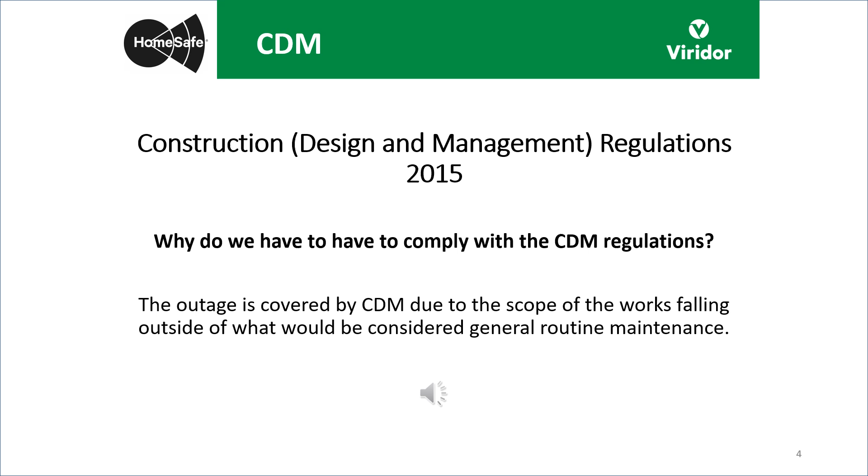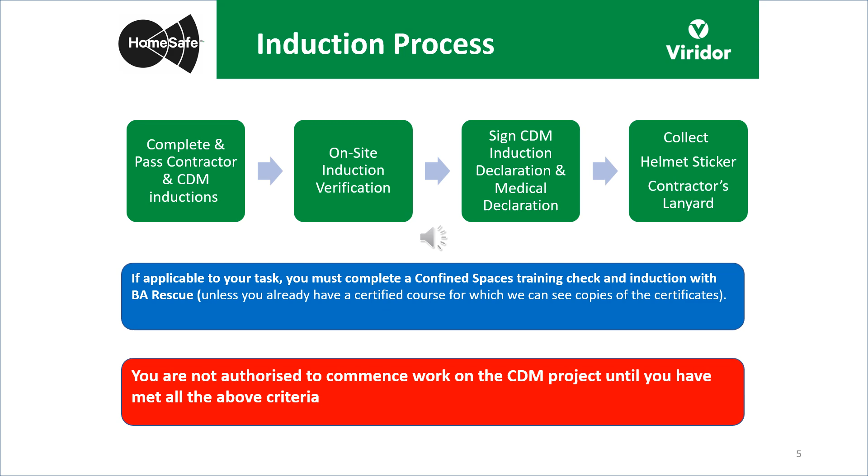BA Rescue will be providing confined space management and security services on site. Please think of them as an extension of the Viridor team, and they'll be able to answer any questions you may have around confined spaces or safety in general.

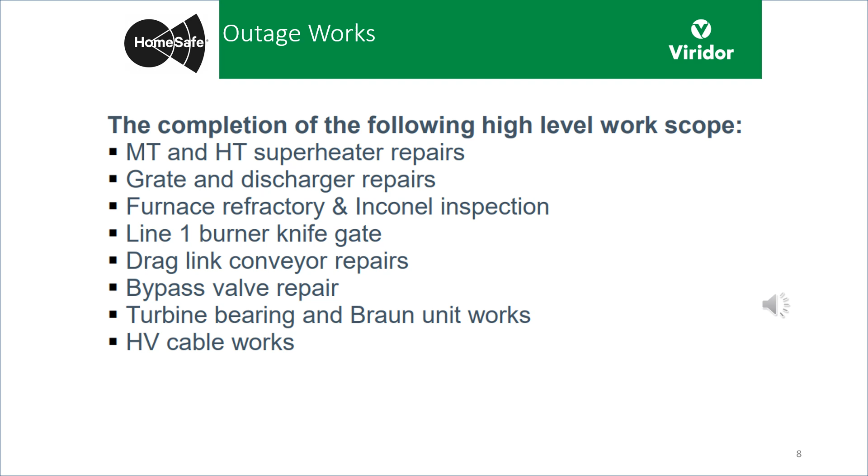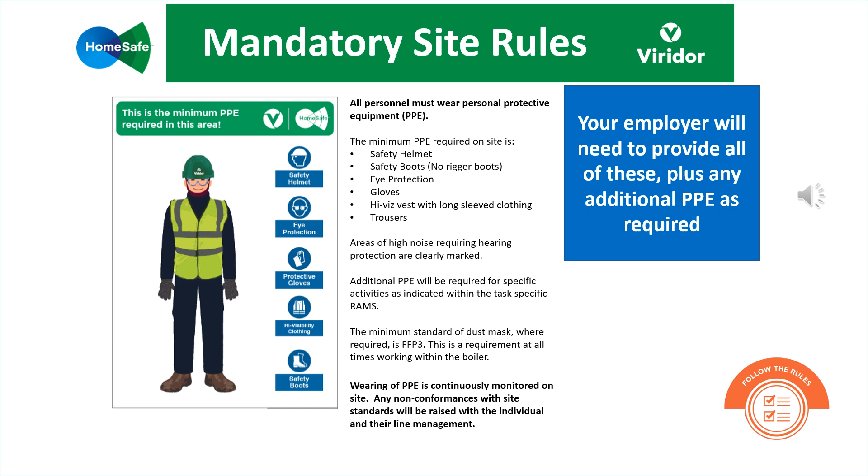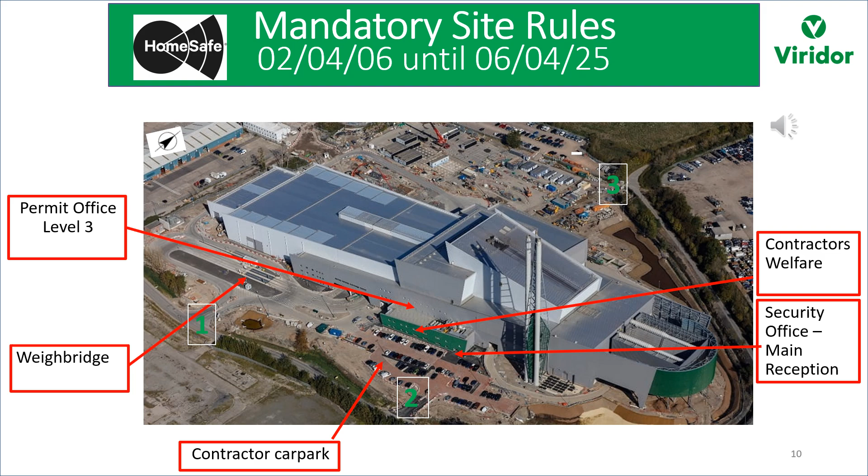The welfare will be in the Polymers building, which will be directed via signage from the main entrance to the ERF. The permit office is in the usual place on level 3 of the admin building.

During the initial stages between the 2nd and the 6th of April, you must always enter and leave site through the ERF reception. This can be found at the entrance to the site and is displayed on the screen. You must sign in and out when leaving site at any time.

From the 2nd until the 6th of April, please ensure that you always leave site via the ERF reception. This can be found on the screen and is at the entrance to site via Gate 2. You must sign in and out when leaving the site at any time.

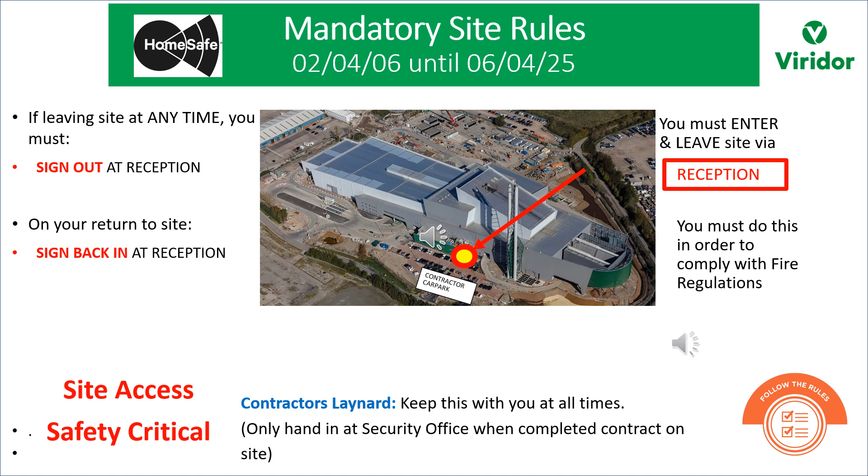From the period of the 2nd until the 6th of April, you must always enter and leave site through the ERF main reception, ensuring that you sign in and out using the book. This is to ensure that we comply with the fire regulations, and should there be an event of a fire, we know who is on site at all times. The ERF reception can be found at the entrance to site as displayed on the screen.

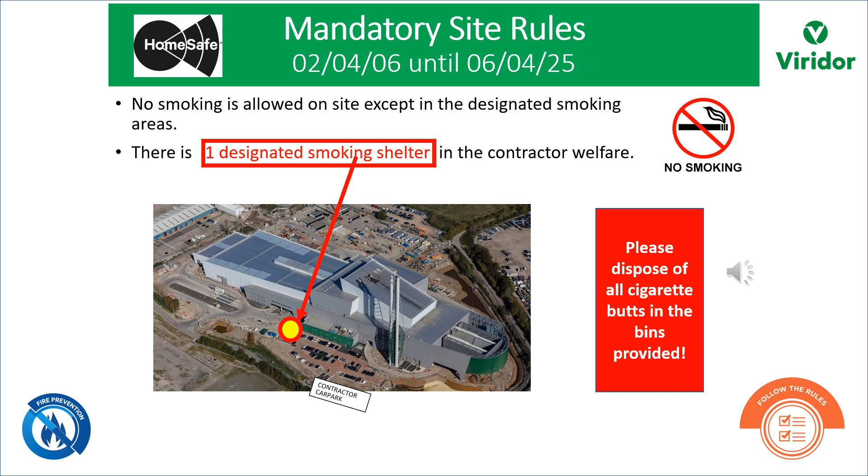There is strictly no smoking or vaping anywhere on site apart from the designated smoking area. There is a designated smoking shelter shown on the screen, which is at the front of the ERF. Please ensure you dispose of all cigarette butts in the bins provided.

From the 2nd until the 6th of April, the muster point is located in the Contractors Village car park. Contractors must make their way there as quickly as possible and make sure you've been accounted for by one of the Viridor fire marshals. You will only be allowed back to your work area when the all clear has been given by a member of the Avonmouth ERF staff.

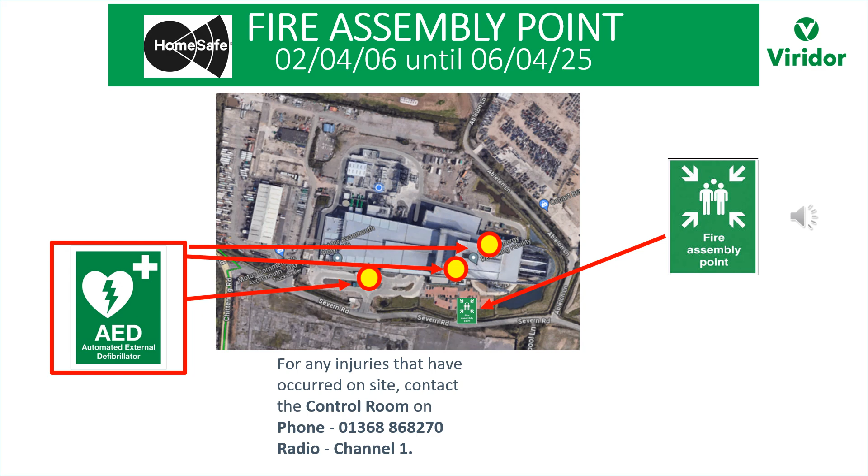Do not leave the site unless instructed to do so by Avonmouth ERF staff. There are also a number of automated external defibrillators on site, including the weighbridge, the level 3 permit office, the level 4 control room, and the ground floor of the boiler hall.

As previously mentioned, contractor welfare will be split into 2 phases. From the 2nd until the 6th of April, car parking is located at Gate 2. Remember, you must reverse park. Please car share wherever possible.

The offices and welfare facilities will be clearly signposted from the Avonmouth ERF main reception. Female toilet facilities will also be available. You as a contractor are fully responsible for the security of your own belongings and equipment whilst you are on site.

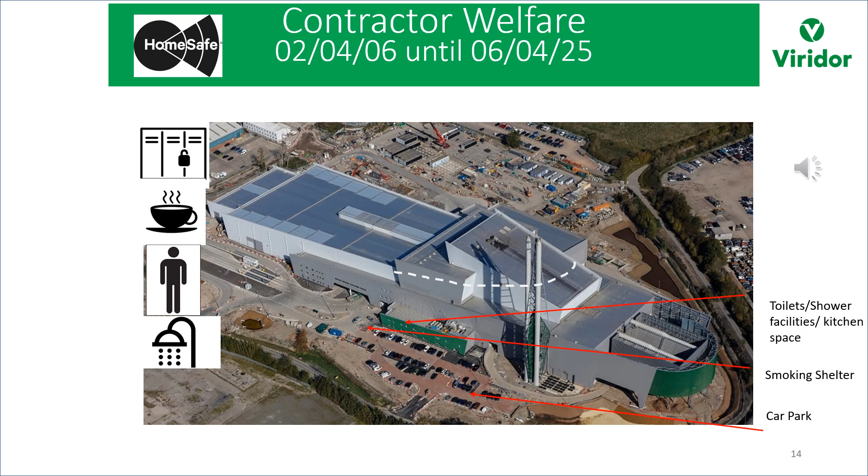The following slides detail the arrangements for Phase 2 of the welfare arrangements from the 7th of April onwards. Here is an aerial view of the site. The weighbridge is located at Gate 1. The entrance to the Viridor staff admin car park is located at Gate 2.

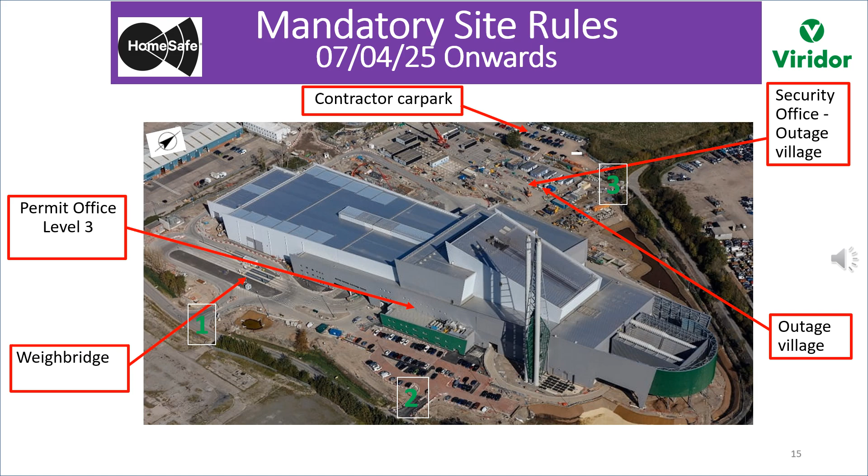Entrance to the contractor car park and welfare facilities from this stage onwards is located off Abbots Lane at Gate 3. There will be road signage to direct you to the Outage Village on the north of the site. The security office is at the entrance to the Outage Village. The main admin building is on the south side of site. The permit office is located at level 3 of the admin building.

From the 7th of April onwards, the muster point is located in the Contractors Village car park. All contractors must make their way there as quickly as possible and make sure you've been accounted for by the Viridor fire marshals. You will only be allowed back into your work area when the all clear has been given by a member of the Avonmouth ERF staff.

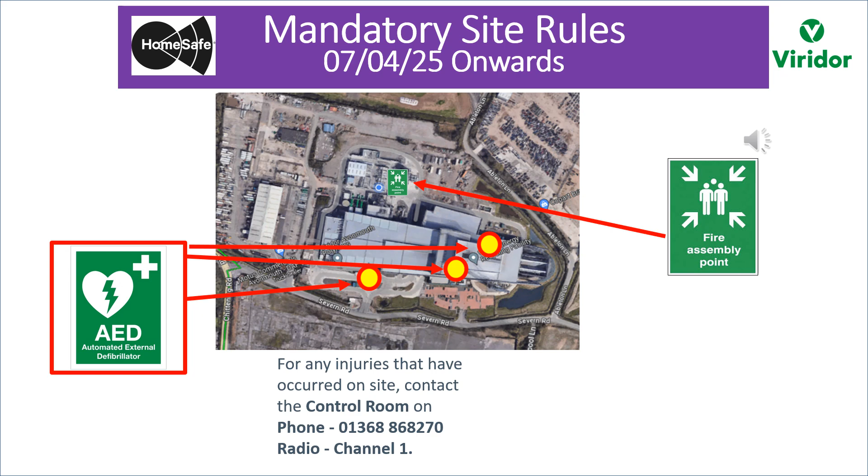Do not leave the site unless instructed to do so by Avonmouth ERF staff. There are also a number of automated external defibrillators on site, which are located at the weighbridge, the control room on level 4, and the ground floor of the boiler hall.

Contractor welfare from the 7th of April onwards. Car parking will be located at Gate 3 off Abbots Lane. Remember, you must reverse park, and please car share wherever possible. Offices and welfare facilities will be clearly signposted. A female toilet facility will be available in the Outage Village.

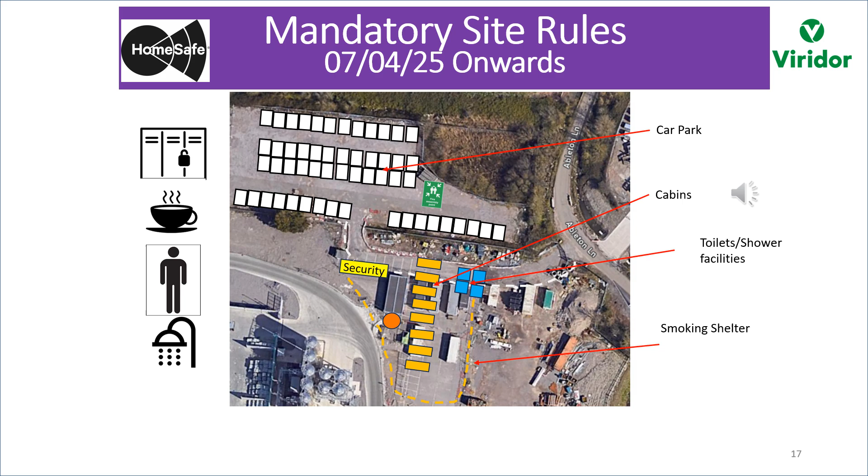From this phase onwards, under no circumstances should contractors be using the Viridor staff facilities. You as a contractor are fully responsible for the security of your own belongings and the equipment whilst you're on site.

From the 7th of April onwards, you must always enter and leave site through the security office and sign in and out via the sign-in book. This is to ensure that we are complying with the fire regulations and are aware of who is on site should there be a fire. The site security office can be seen on the screen.

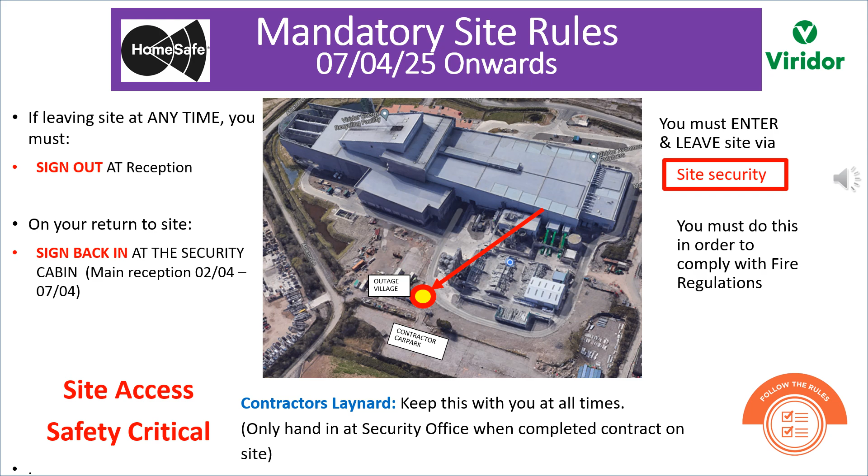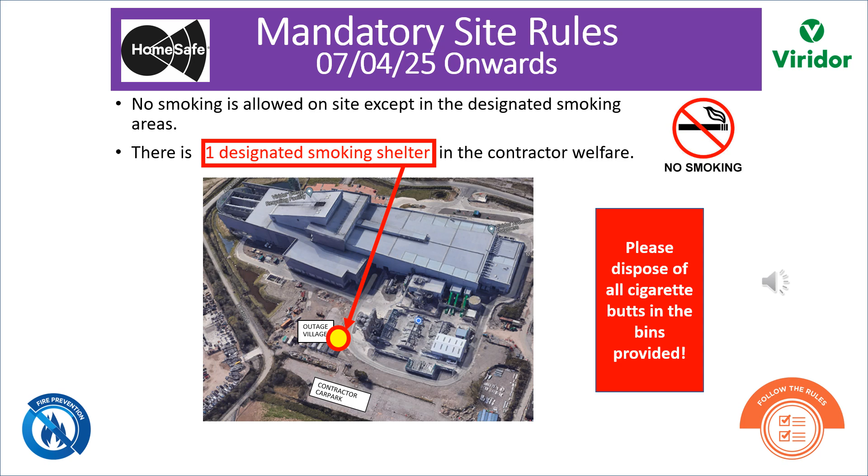No smoking is allowed on site except in the designated smoking areas. This includes vaping. From the 7th of April onwards, there will be a designated smoking shelter in the contractor's welfare. Please ensure you dispose of all cigarette butts in the bins provided.

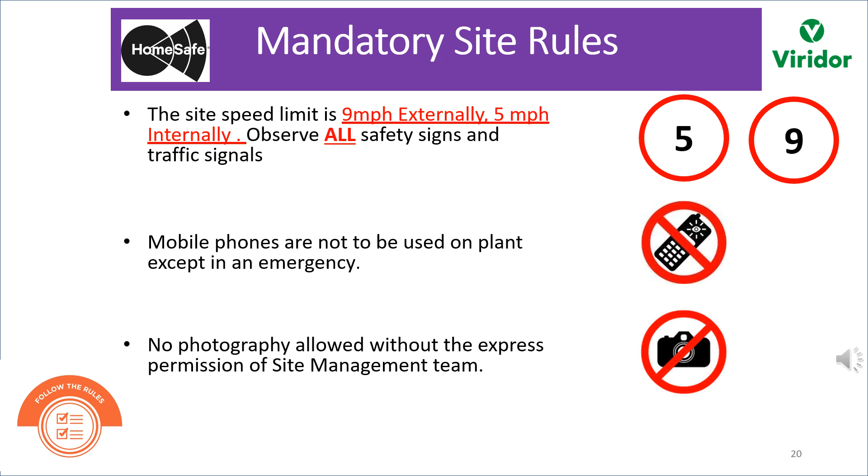It is strictly forbidden to steal, cause willful damage, consume alcoholic drinks or drugs, or bring illegal substances onto site, or engage in any other activities which could jeopardize the safety of any person. Such behaviour will not be tolerated.

Viridor reserves the right to conduct random searches of both people and vehicles entering and exiting site. Entry may be refused, or you may be asked to leave site, if items found during a search cause concerns for the health, safety and welfare of all on site.

If you do not comply with the site rules, you may be issued with a yellow or red card. A red card means you have to leave the site immediately. Listed on the screen are just a few examples of the infringements that could lead to cards being issued.

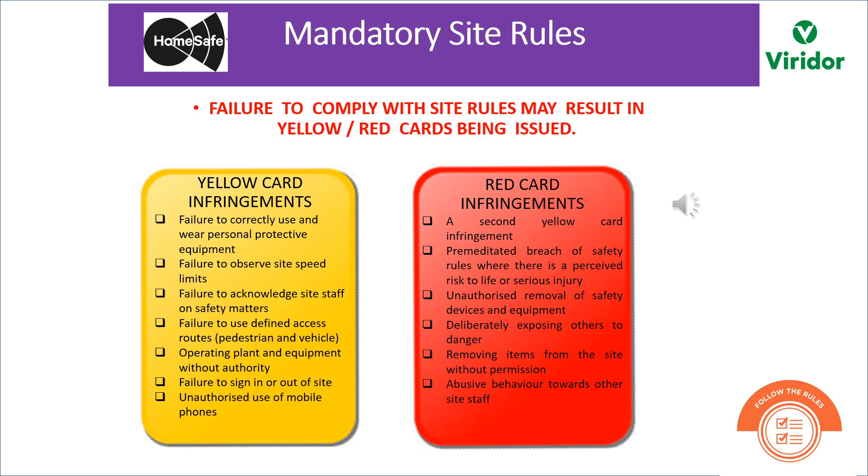The Operations Control Room is responsible for coordinating all emergency responses for fire, first aid or spillages, and this would be done through the duty shift team leader.

If you discover a fire, raise the alarm immediately and inform a member of the Avonmouth ERF staff. Everyone on site must go to the muster point as quickly as possible if the evacuation alarm sounds. Not responding or responding slowly may lead to a yellow card being issued.

Our fire alarms are tested weekly at 10 o'clock every Thursday. When the alarm goes off during this test, please do not do anything. If the alarm continues to go off, or you hear the alarm at any other point during the week, you must proceed to the muster point immediately.

The tap water in the welfare facilities is drinkable and there will be bottled water available on plant. Please ensure that all of your waste is placed in the bins provided, and ensure that all electrical equipment brought to site is PAT tested.

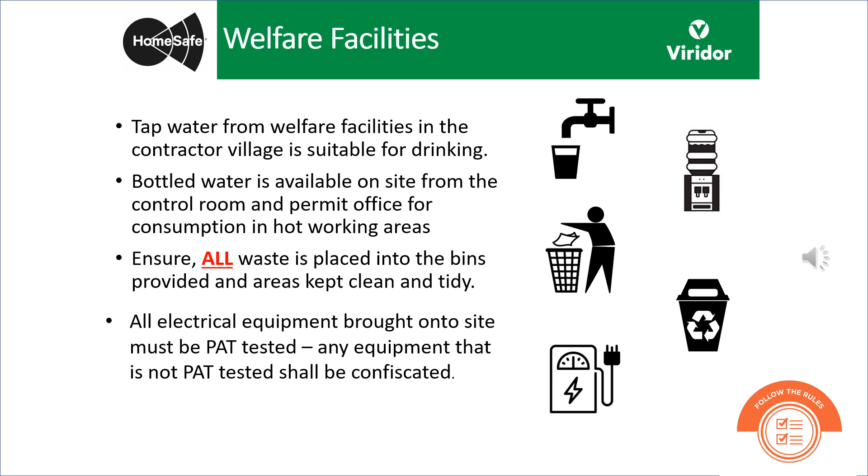All tasks require a safety document. Your risk assessment and method statement must be provided a minimum of 72 hours in advance of work commencement. A Viridor Senior Authorised Person, or SAP, will issue your safety document to protect you from system-derived hazards. The Point of Work Risk Assessment, or POWRA for short, must be collected from the permit office when your safety document is issued.

The POWRA must be completed by your nominated supervisor before work starts. General safety must be established by the nominated supervisor and recorded on the POWRA before the start of each working period. Any questions you have on this process, please contact a member of the ERF staff.

This slide will discuss certain aspects of the permit system. All permits must be surrendered each time you leave site and at the end of every day, at the permit office only. Hot work requires a specific permit due to the fire alarm and automatic sprinkler system. No hot works can be undertaken without a permit.

General safety includes, but is not limited to: ensuring you are using the correct tools and equipment, safe access and egress, the correct working method for the job location, the correct PPE for the task, and the working area itself. This is a supervisor's responsibility. Working areas must be tidied up in line with your POWRA safety requirements.

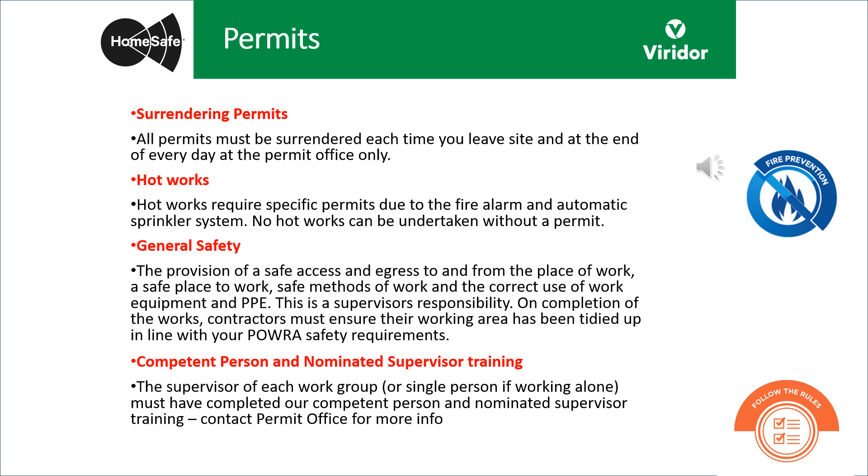Competent person and nominated supervisor training: the supervisor of each work group, or single person if working alone, must have completed competent person and nominated supervisor training. Please contact the permit office for more information.

The most common confined spaces on site are as follows. To enter or work in a confined space, you must have the correct training, certification, equipment, and permit before entering. You must log in at the entrance and hand over your tally tag.

You may exit the confined space at a different level from which you entered it, so you must return to your entry point to log out and pick your tally tag back up. A klaxon or air horn will be used as the evacuation signal for confined spaces.

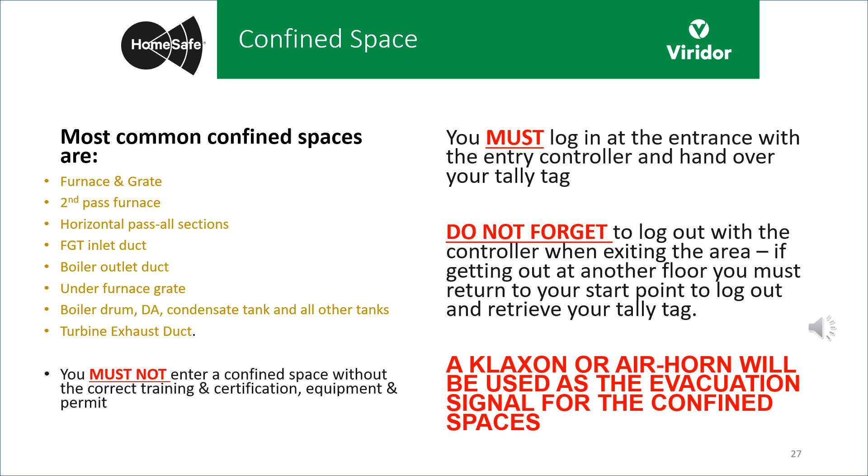Working at height will be part of the risk assessment and method statement produced before the commencement of any work. This can vary from the use of a MEWP to the use of rope access.

Please ensure that what is written in the RAMs provided is followed exactly, and clip on where appropriate, using the access equipment correctly.

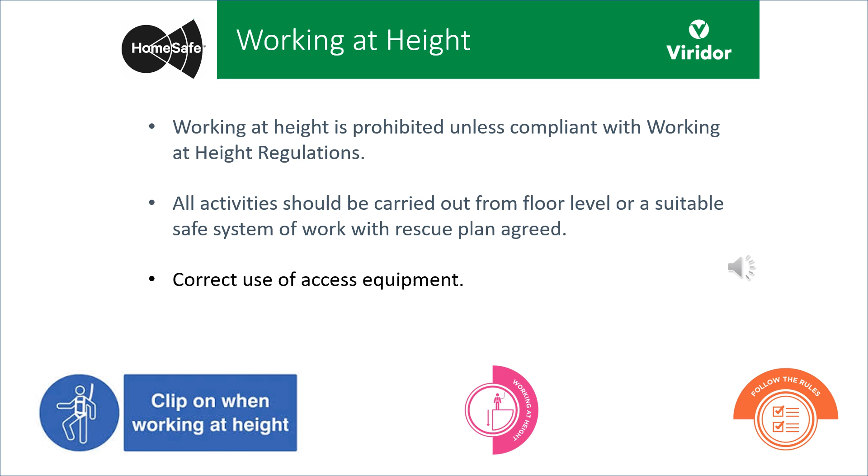If using ladders, they must be inspected by a competent person and have correct inspection tags. Always visually inspect ladders before use and ensure they are stored correctly. It is Viridor's policy that ladders are used for access only and should not be used for work that could go on for a considerable amount of time. Please consult your supervisor if you are unsure of any of this.

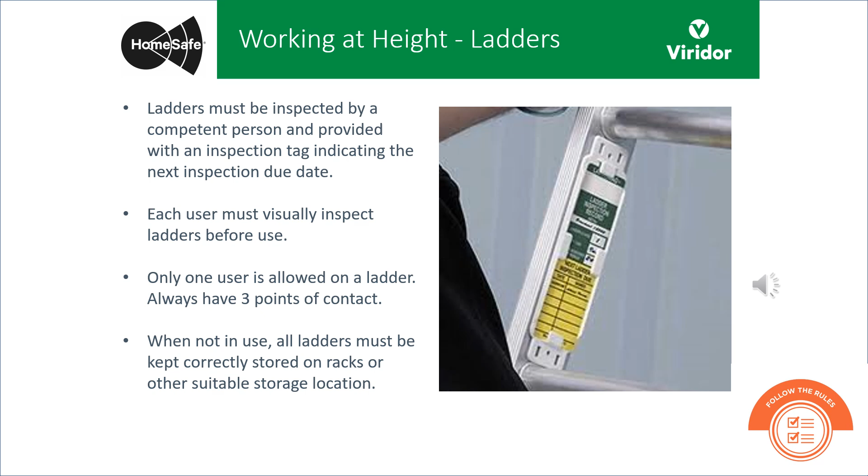All scaffolding must be erected, maintained and inspected in strict accordance with current legislation and only by competent, authorised personnel. The scaffolding team for the Avonmouth ERF outage will be Raynham's, so please consult them for any questions on scaffolding.

Before using it, you must carry out your own individual visual inspection, and if you have any concerns or find any defects, report them immediately to a member of the Viridor ERF staff and Raynham's, and do not use the scaffold until it's been properly inspected and repaired.

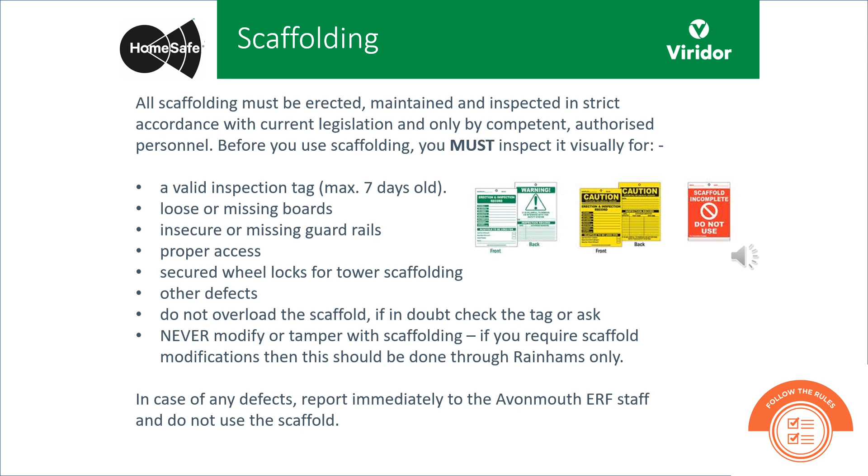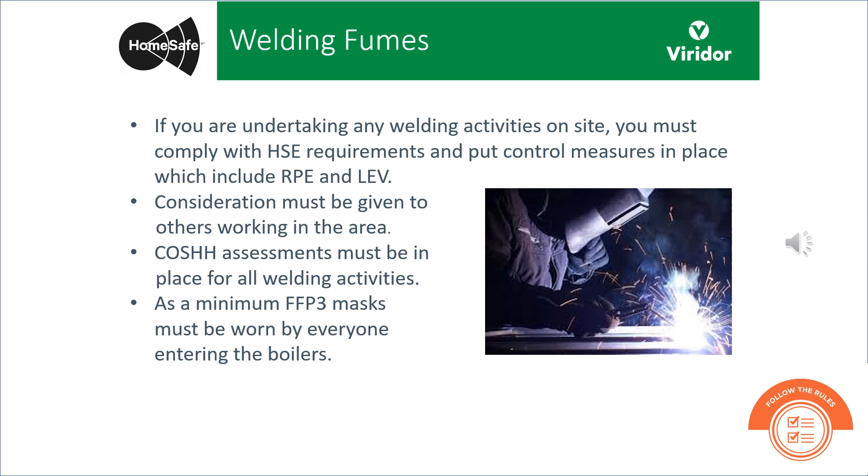Chromium-6 has been found at a number of the Viridor outages. It is a compound that has a significant effect on health. The compound can enter the body through inhalation of dust, skin contact with solids, or swallowing dust through food handling.

Such exposure over a prolonged period can cause serious health effects such as damage to the nose, inflammation to the lungs, allergic reactions on the skin if contacted, or cancer of the lungs. More information can be found on the HSE website.

Some areas where the deposits have previously been observed are the furnace, the boiler drum, external surfaces of high temperature pipework and associated components, and the steam turbine inlet valves.

Any personnel entering the boiler prior to grit blasting must assume that chromium-6 may be present and wear the minimum of respiratory protective equipment with an FFP3 filter to EN 140 or equivalent with a protection factor of 20.

Disposable nitrile or chemical resistant gloves. Disposable protective coveralls with a level 5 protection to EN ISO 13982.

These coveralls must be removed on exiting the boiler to minimise the spread of dust, so please ensure there are spare coveralls available prior to entry. Goggles must also be worn if you are not wearing a full face mask.

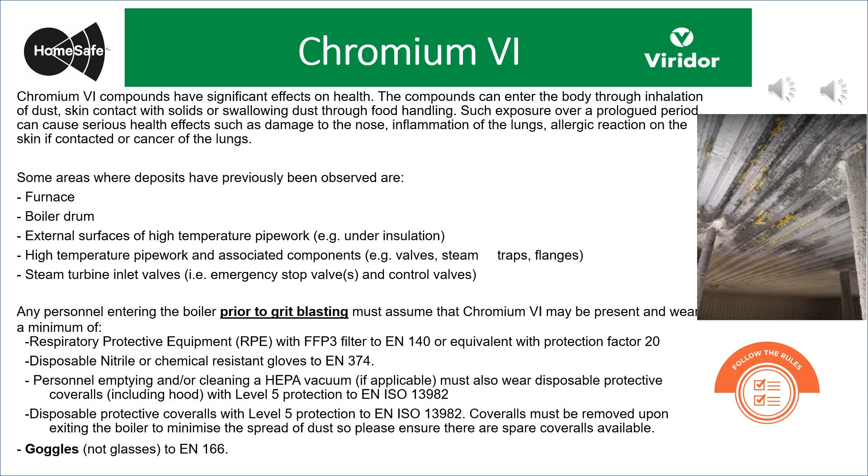Should chromium-6 be observed in any areas not included in the grit blasting regime, please stop work and raise this with the management team so that we can reassess and ensure sufficient control measures are in place. If you have any questions regarding this process, please reach out to the ERF management team.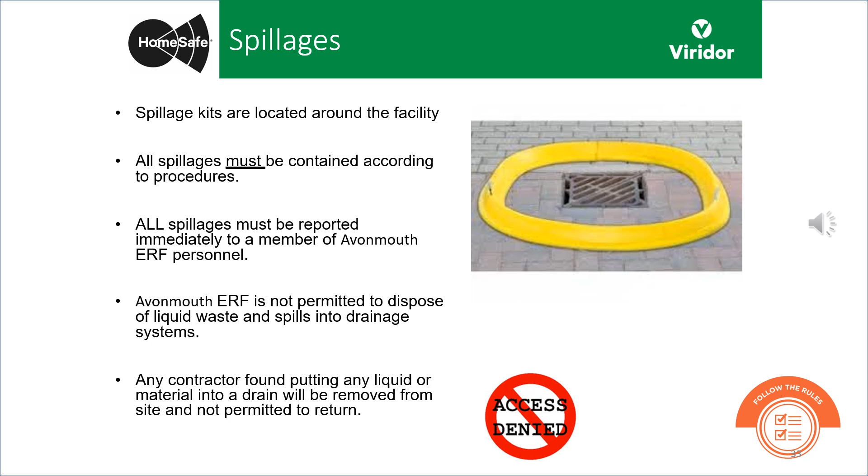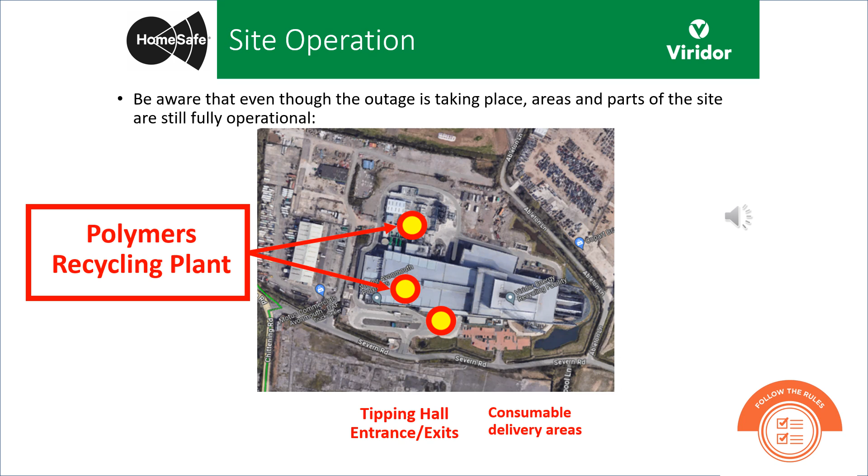So remember, stay in your designated area. You must ensure that you have correctly identified the plant or equipment before commencing work. Don't start work if you have any concerns at all about the equipment or the isolations, and remember, no work can be carried out without a permit.

Good housekeeping helps prevent accidents. Remember to keep your point of work clean and tidy, ensuring walkways are kept clear and all litter is disposed of in the bins provided. Don't rely on others. Good housekeeping is everybody's responsibility.

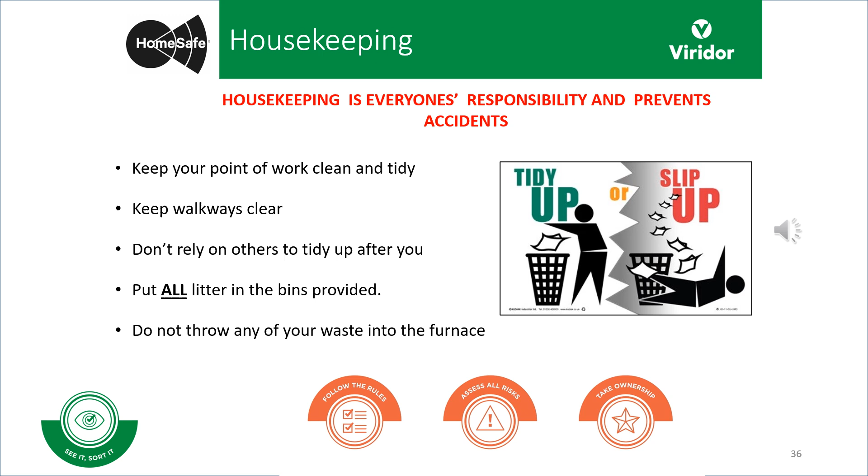Good, clear communication is vital and will help support a successful outage. There will be a daily team meeting and progress meetings at 9 o'clock in the morning in the ground floor admin block meeting room. These will be attended by the site management team, the SAP, the STL, and a supervisor from each of the contractors.

Please ensure that you feed back any news and updates to your supervisor prior to these meetings. A progress meeting will be held in the same location at 4 p.m. every day. If standards fall below the expected level, then a site stop may be used.

Be aware that there will be a higher volume of people on site than normal, and that many of them will be unfamiliar with the site. Think about the tasks you're doing and how they might impact on others. Look out for one another, even if they're not part of your team. We all want a successful outage and a safe outage.

Two-way radios will be made available to contractors. The channel users are shown on the screen. Channel 1 is used by the Viridor control room and emergencies. Channel 2 is used for the weighbridge and waste operations. Channel 3 is used for the Viridor and engineering maintenance team. All contractors will be on Channel 6, 7 and 8.

Please be respectful and limit use to essential communication only. All work parties must have at least one radio. All radios must be signed in and out via the BA rescue team.

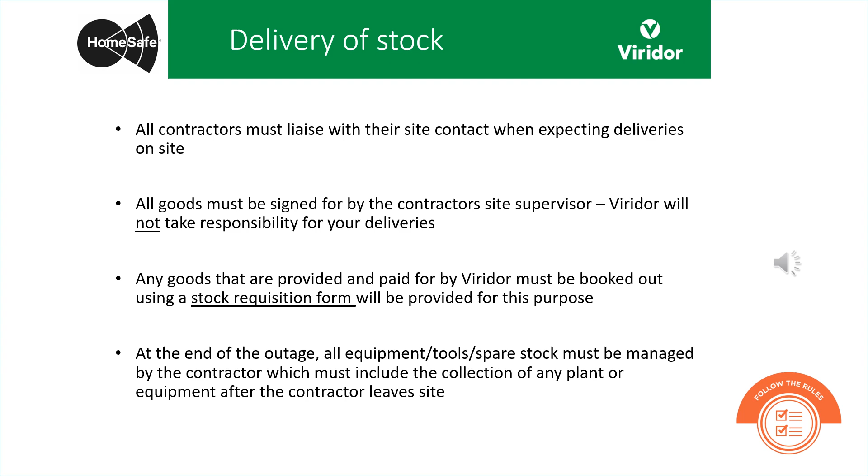If you require any goods from Viridor, then they must be booked out using the site stocks requisition system. Contractors are responsible for managing the removal of equipment, tools, spares and stocks from site. Anything left over after the outage is finished may be removed from site.

As a waste management site, we have a duty of care to inform you of a disease called leptospirosis, or Weil's disease, that is transmitted to humans through contact with infected rat urine. This is a serious and sometimes fatal infection that can start with flu-like symptoms but can lead to serious complications and possibly death. You can reduce the risk of transmission by wearing protective clothing and washing your hands after working on site, and always before eating, drinking or smoking.

There are various bait boxes on site and we have a pest control service agreement in place. If you have any questions, please speak to a member of Viridor staff.

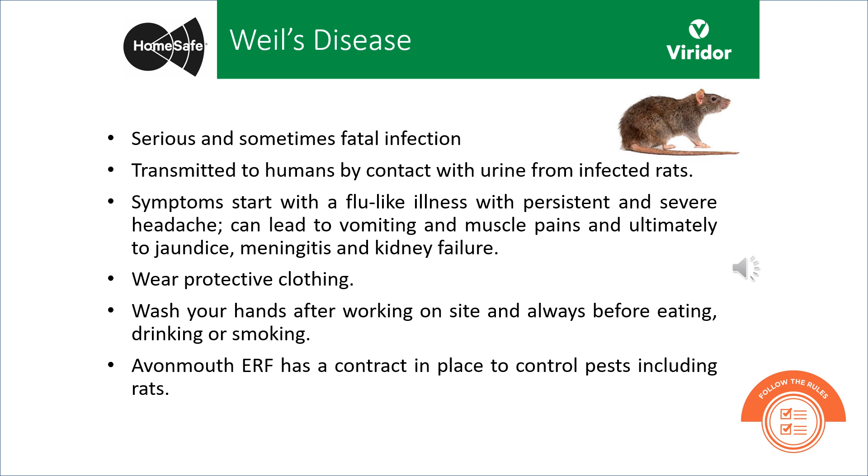CCTV operates across the whole site and is used for safety and security purposes. Please be aware that you will be on camera whilst working, and this can be used in the event of accidents, near misses, and for general site compliance.

Finally, I'd like to thank you very much for your time today, and please remember that if you're unsure about anything, you must ask. There's no such thing as a silly question, and never assume. Let's ensure that everybody gets home safe.